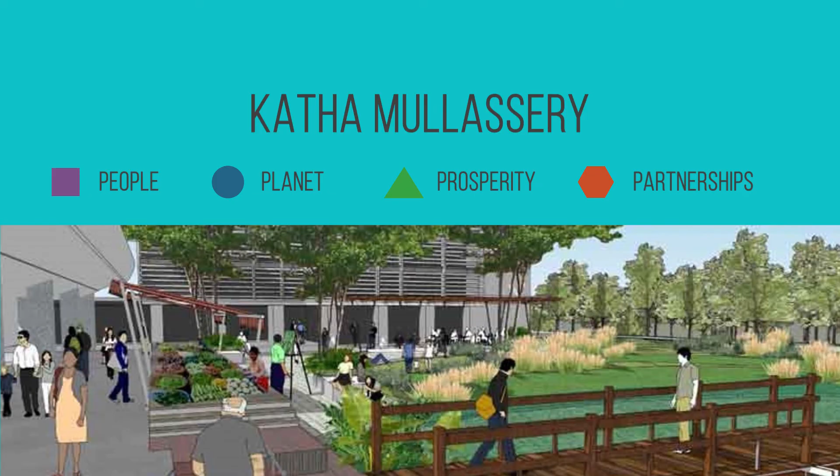The story of our competition entry, self-titled by us as Katha Mullassery, spans across 5 cities, 2 time zones, and nearly 2.5 months. The way the team came together, the process of working and putting together the final outcome, is a story that is as important to the final entry as the design decisions themselves.

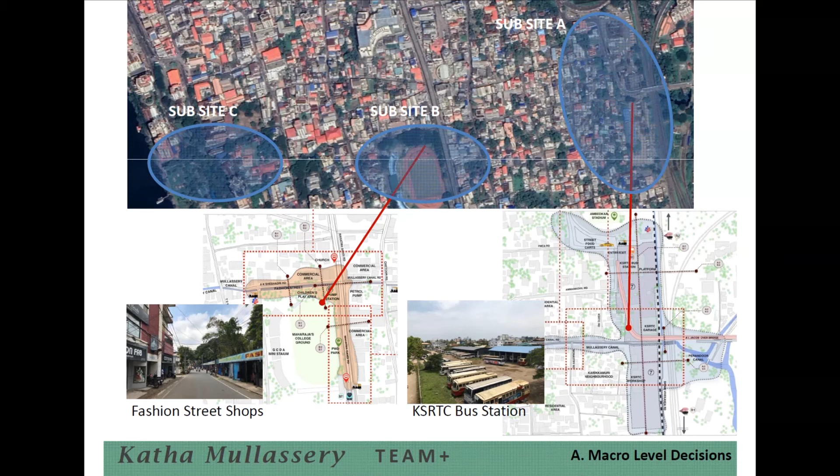The actual design exercise was undertaken simultaneously at two levels. Using the framework of the United Nations Agenda 2030 of People, Planet, Prosperity, Partnership, and Peace, we established and analyzed the broad issues highlighted in the design brief as well as our visions for the precinct. This framework helped us map the problems, stakeholder recommendations, and potential of the precinct and subsites in a way that brought out critical interventions and the manner in which we could address the problems so as to achieve co-benefits for stakeholders.

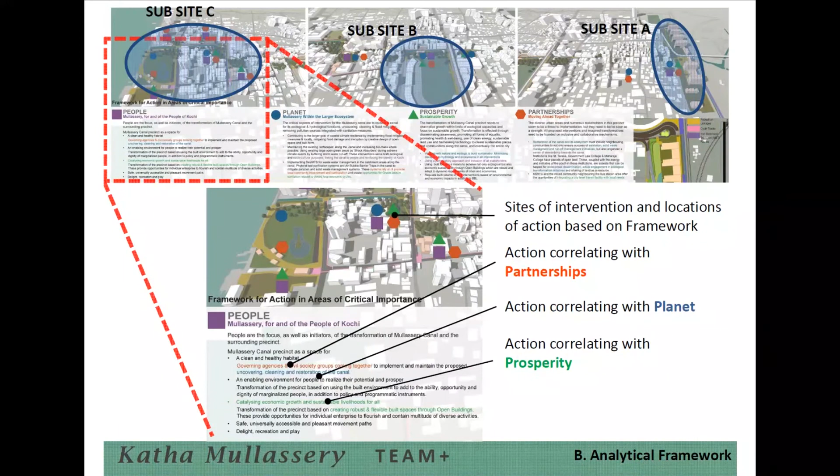Our intention was to ensure each action under any one area of people, planet, prosperity, and partnerships was reinforced by actions and outcomes in other areas, resulting in well-rounded interventions. These interventions were then mapped out on the physical sites within the precinct. The synergies between all the critical areas were clearly concentrated in the design interventions of the subsites, especially around the KSRTC bus station and the Fashion Street.

So at the master plan level, our moves were directed by some broad considerations. Two most important ones were to reimagine Mullassery within the larger ecological system, pointing to the revival of its ecological and hydrological functions for the precinct, and also towards larger goals of coastal climate resilience.

The second important aspect was to re-envision Mullassery Canal for and of the people of Kochi by ensuring that all actions focus on people and they are also the initiators of the transformation of the precinct. This was aided by actions within the areas of green growth principles for prosperity and focus on collaborative efforts for taking ahead the transformation through very strong partnerships. And it was assumed that our proposals could be easily woven into the already established methods of participative efforts towards sustainable development in Kochi and the state of Kerala as well.

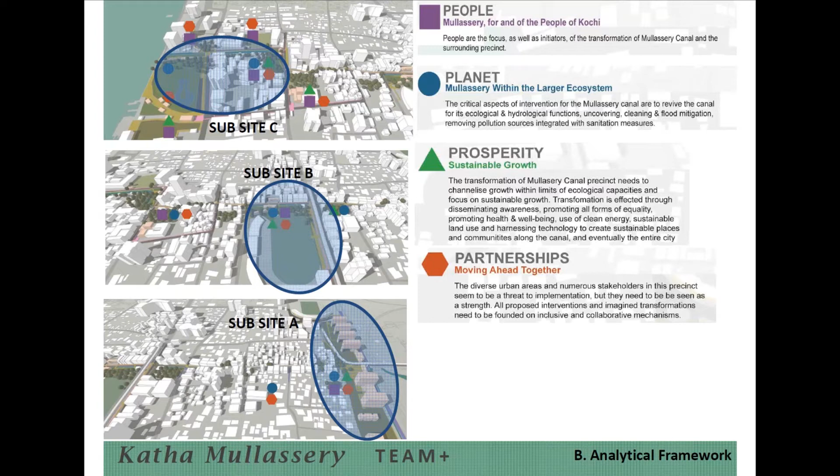So the other level was to create strategies at the precinct and subsite level for ecology, hydrology, placemaking and mobility, and built environment. We therefore developed narratives for each of these themes, which formed a large part of our online discussions as a team. So the first sector to be tackled was obviously the hydrology ecology narrative for the master plan level decisions. This was, needless to say, closely linked to the sanitation and the drainage of the entire catchment area.

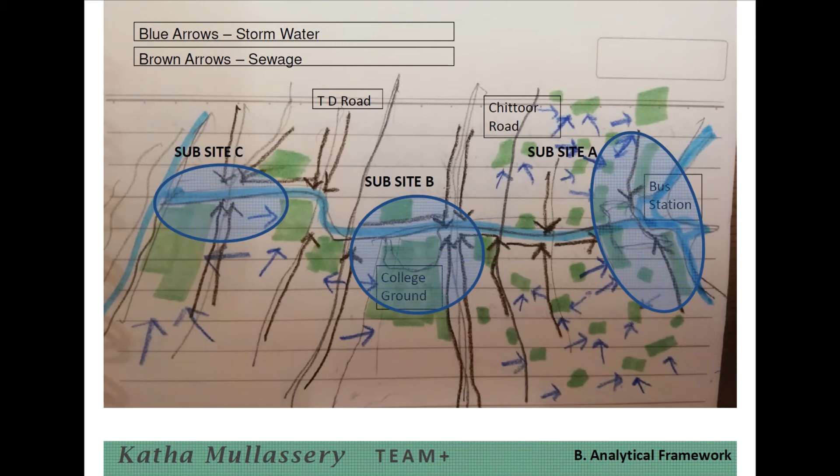Apart from the obvious uncovering and cleaning of the canal, stormwater management required interventions which were twofold. One was the reduction in surface runoff by promoting green roofs wherever possible. So we've identified that as number one on the slide.

And rain gardens and using existing public softscape areas to act as shock absorbers by buffering storm runoff. Number two, to create more room for the canal by widening and treating the edges of the canal to increase capacity to accommodate variable water volumes. This was accomplished through detention ponds at the KSRTC subsite and by regrading the edge of the adjacent land at the Maharaja College's ground just south of Fashion Street.

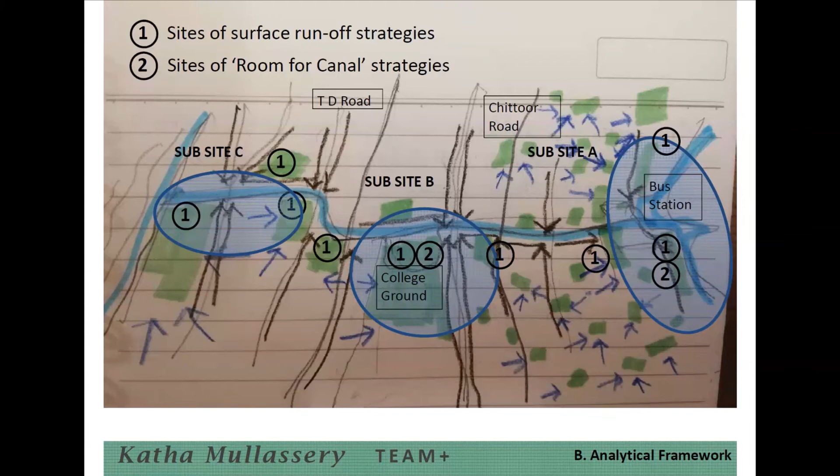So to address sanitation, a graded system of solutions was thought of. The application of DEWATS, decentralized wastewater treatment systems, with grey water recycling via flushing systems was our preferred choice. However, since this entails large-scale refurbishments which may not be immediately viable for individuals, a secondary method of root zone treatment was proposed to be implemented. And lastly, where space constraints would not allow RZT, aquaponic systems were proposed to recycle the treated grey water.

Incidentally, a successful pilot project for aquaponics exists in a small village called Cherai, which is very close to Kochi.

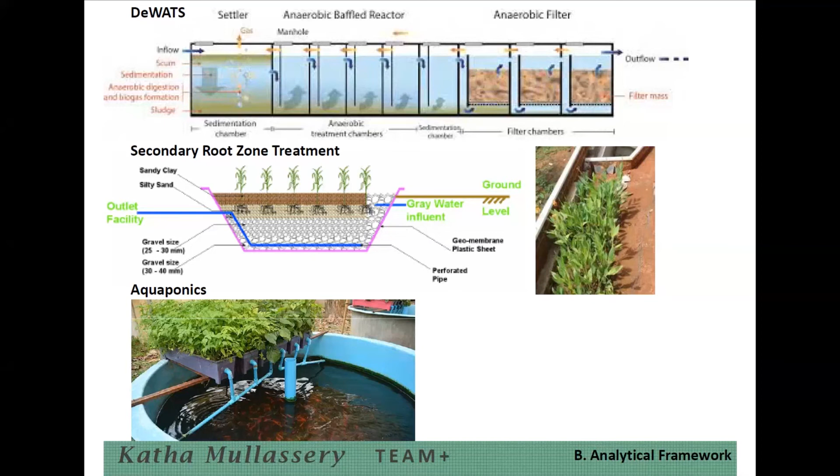So then, poring over the street view images on Mapillary, which was new for some of us - it's a user-driven street-level imagery platform, a collaborative platform - it helped us see the ground reality regarding the imageability of the entire precinct.

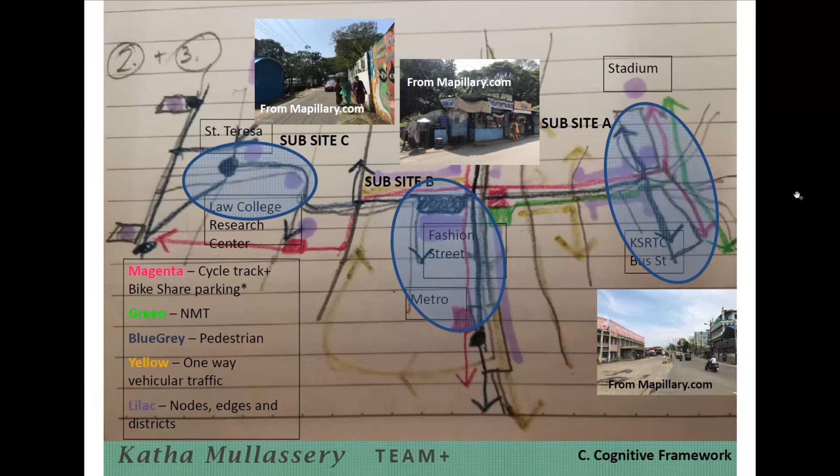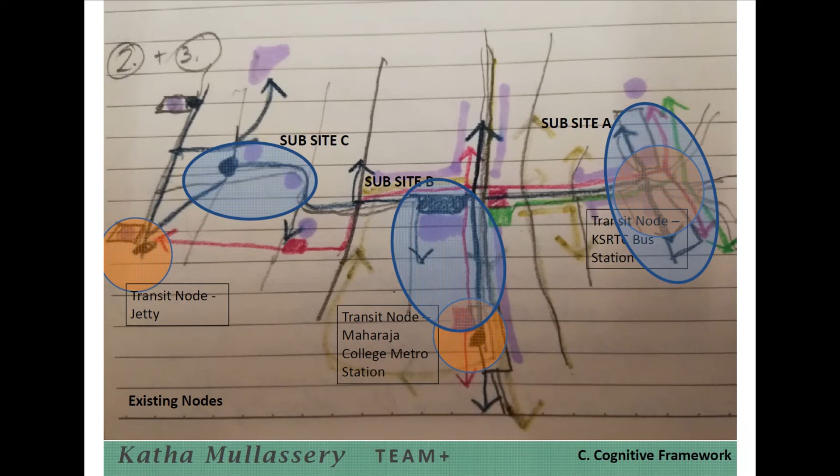The canal, as Anamika pointed out, is mostly visually disconnected from movement paths. So our main intent was to address not only the connectivity between the three nodes, that is the KSRTC bus station on the right, the metro station in the middle, and the jetty on the left, but also to use placemaking and pedestrian shortcuts as stitching devices to weave the canal back into the city fabric.

So this led to the development of new urban nodes in conjunction with the existing nodes, being in orange, and the new urban nodes being in red. These were created with the objective of layering multiple activities involving a wide range of users and increasing safety through the day and night.

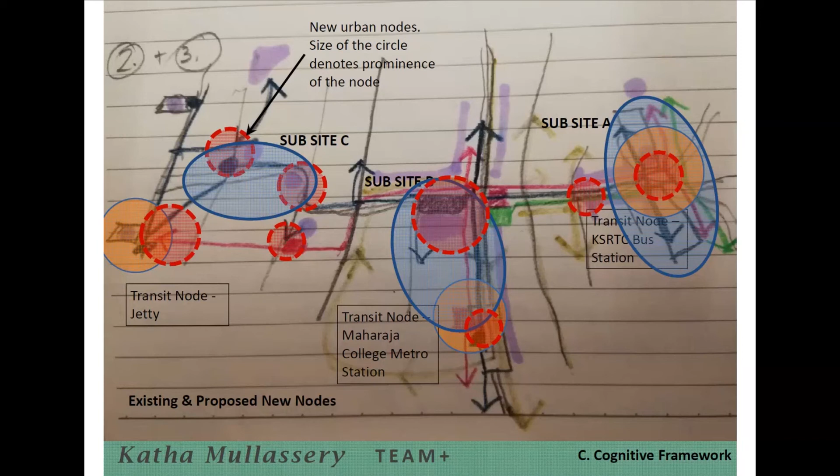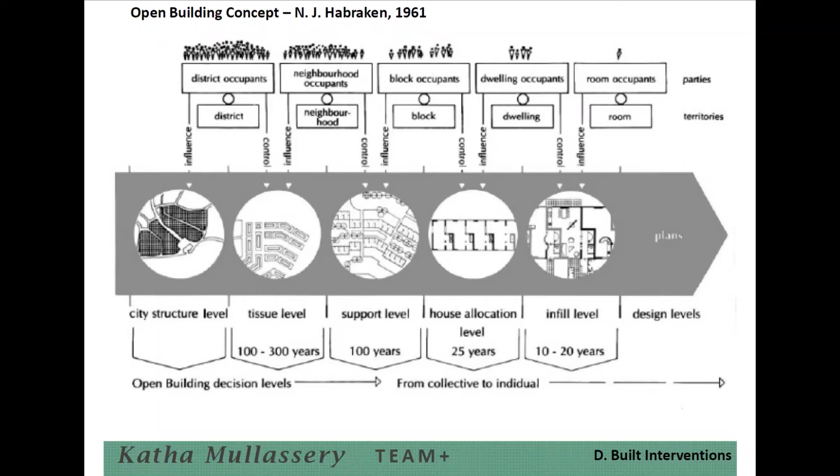While the decisions regarding hydrology and ecosystem related aspects of the canal were specific in the type of interventions, we realized that any built interventions would need to be robust and flexible to be implementable. So the designs for the redeveloped Fashion Street Market and the bus station were both based on open building systems, a concept introduced long ago by John Habraken. The diagram on screen summarizes this concept. These systems were used, lending these structures a high level of adaptability, and as a spatial and construction system, afforded the possibility of our designs not being very deterministic in nature.

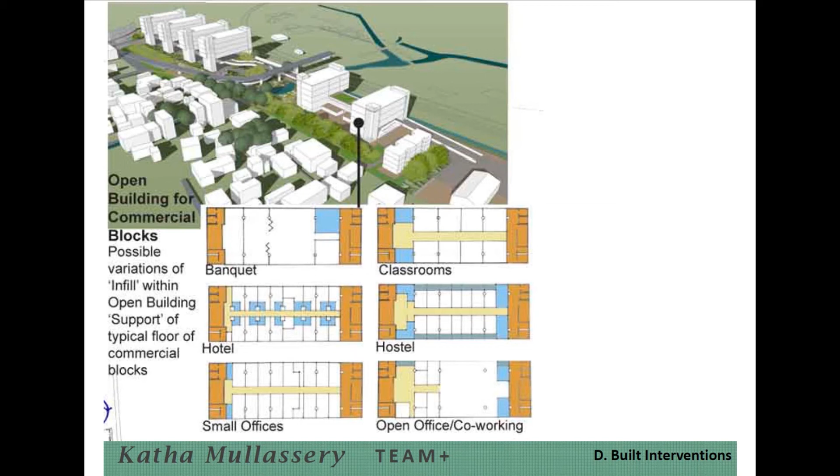At the master plan level, these thematic narratives crystallized into specific interventions across these three domains. The focus was on creating solutions threading all stakeholders and benefiting from their synergies, and the driving philosophy was that of the Geddesian concept of conservative surgery.

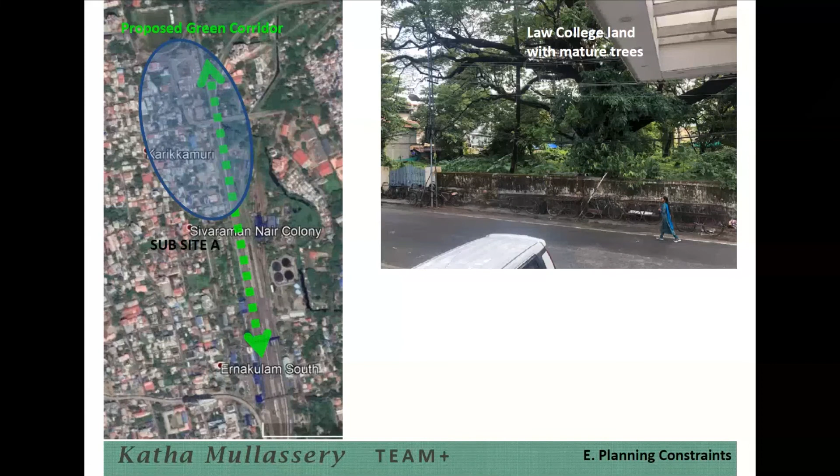The second factor was the land constraints, especially in terms of land available along the canal. Our strategies for hydrology, sanitation, ecology, and build form were grounded in systemic solutions that were viable and implementable within the existing space constraints. Many of our conceptual solutions never made it through the tight sieve of spatial and practical implementability. We had regular discussions on these.

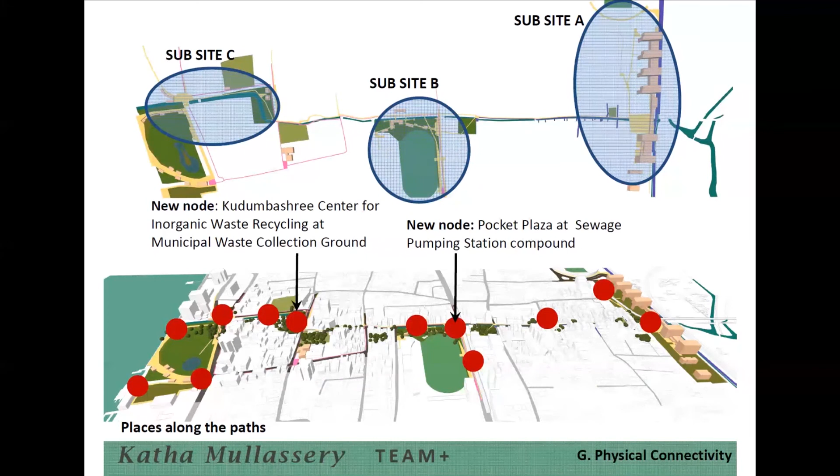So the resultant design proposal was in the form of a continuous, well-connected and experientially diverse pedestrian path and cycle track, highlighted in red on the upper part of the image. These paths and tracks connected the three transit nodes and paratransit points, and also strung together transformed urban nodes like the Fashion Street Market, creating new quote-unquote places like at the Municipal Waste Collection Ground and the Sewage Pumping Station corner. The canal road from the intersection of Karikkamuri Cross was proposed to be an e-vehicle, NMT, and pedestrian zone, with only vehicles of residents allowed to ply one way. This was aimed at catalyzing a transformation of this stretch into a pedestrian-friendly environment with appropriate activities along the edges.

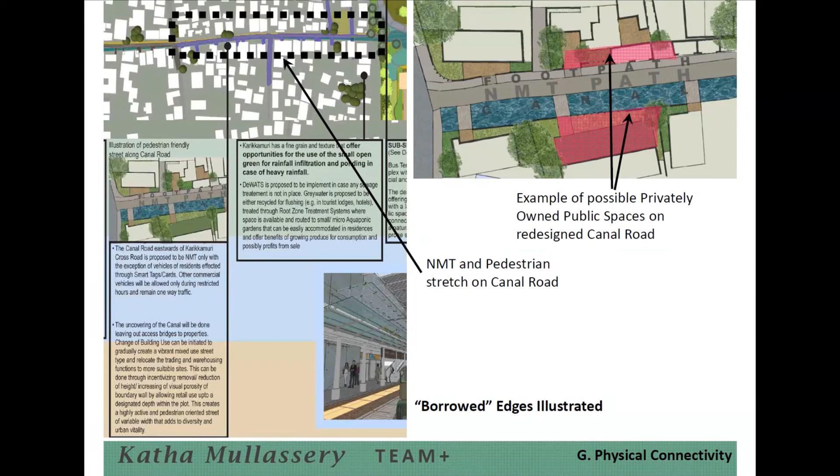We also introduced the concept of borrowed edges, shown in the diagram on the right, that would incentivize pocket-sized, privately owned public spaces - POPs for short - to support the mobility-related interventions. Similarly, the pedestrianized carriageway of MG Road was designed for a wide pedestrian walkway edged on one side by the municipal park, as seen in the rendering on the right-hand side. A cycle track ran along with it, and on the other side, a platform below the carriageway supported evening and informal markets, seen on the left of the rendering. The presence of the park could then be further used by introducing a plant nursery and a composting unit, which would recycle the organic waste from the informal market.

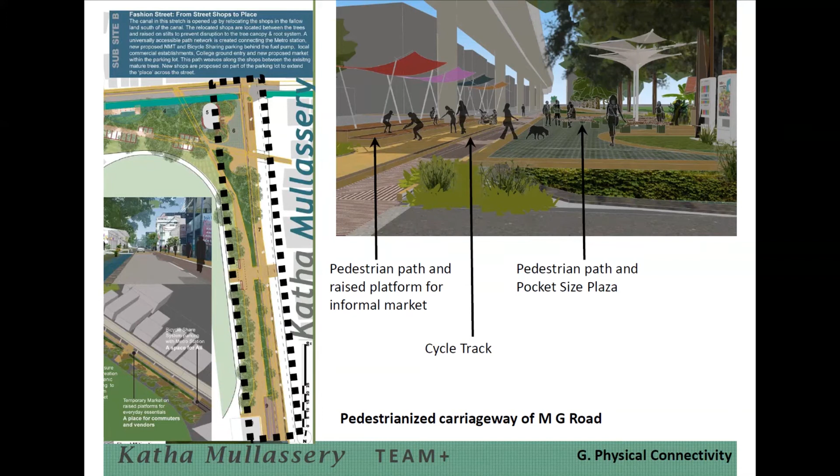The built interventions were seen as flexible, adaptable urban inserts that act as containers of activities which would revive and transform the entire precinct. These were envisaged to catalyze transformation and harness the potentials of synergies between different stakeholders. As an example, the proposed built intervention in the Law College hostel compound, and the channelization of movement of St. Teresa students between their college and hostel compound through the redesigned Municipal Waste Collection Center, were opportunities to harness such potentials. We saw possibilities in promoting interaction between Kudumbashree workers and students from St. Teresa, as Kudumbashree workers were likely to be working in the waste collection compound. We also saw possibilities in promoting interaction between the students from both colleges, between scholars of the Law College and the informal settlements of Padika Kukulam as well.

So that concludes the first part of the broad presentation, and now we'll discuss the individual subsites. The first one is the Fashion Street.

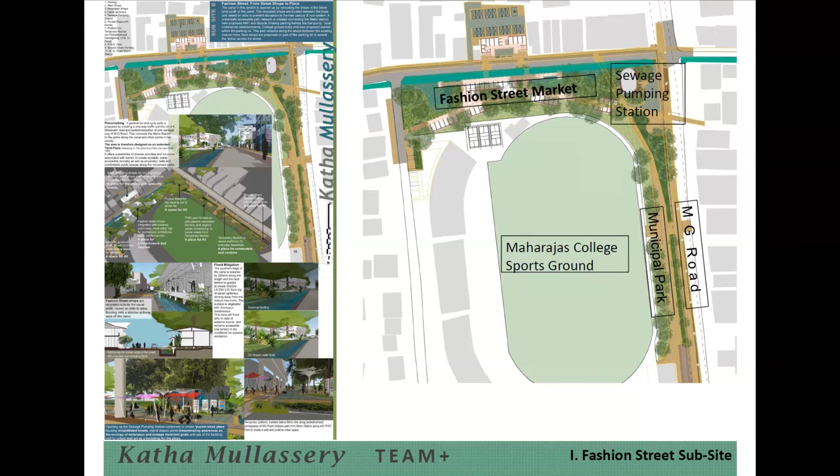This was the more straightforward of the two subsites we selected to focus on, in the sense that the design intents were pretty achievable. Available unbuilt land was used to create more room for the canal for inundation during floods, as you can see where the black arrows point, with the canal going from left to right, and wherever we could create additional storage for stormwater, we proposed that.

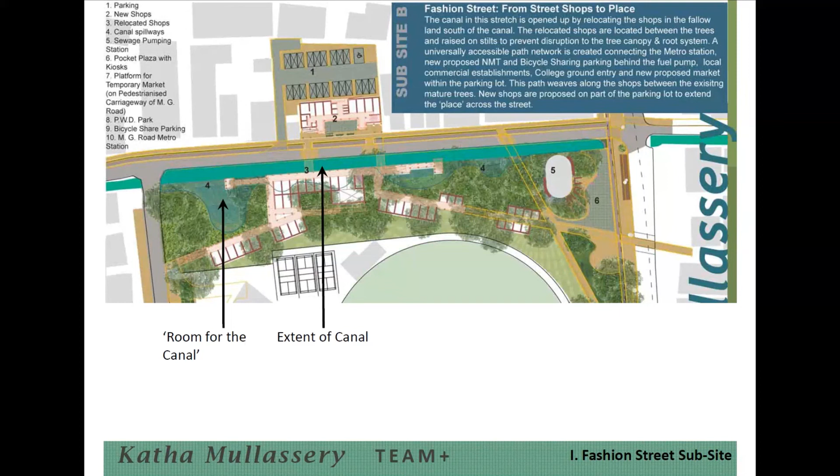This strategy, however, was constrained by the presence of mature trees, so widening the southern bank of the canal was done with attention to leaving as much space for the root systems of the trees as feasible. The absence of any information about the tree types, and therefore knowledge about their root systems and structures, did not allow us to be any more precise in offering a solution.

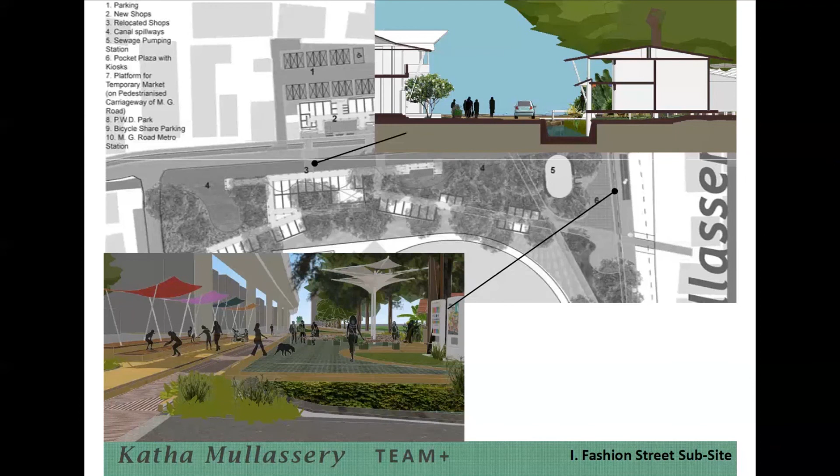But the creation of low-lying, seasonally inundated areas, which you can see in the section at the top below the building, became a starting point for placemaking - using the reorganization of the Fashion Street shops on stilts and establishing pedestrian connections from the Maharaja College Metro to the shops and surrounding nodes.

The raising of the Fashion Street shops on stilts - here's a more detailed rendering - enabled the integration of the reorganized market with the low-lying areas below, and secondly, it offered the benefit of maintaining access and preventing losses to these shops in the event of flooding.

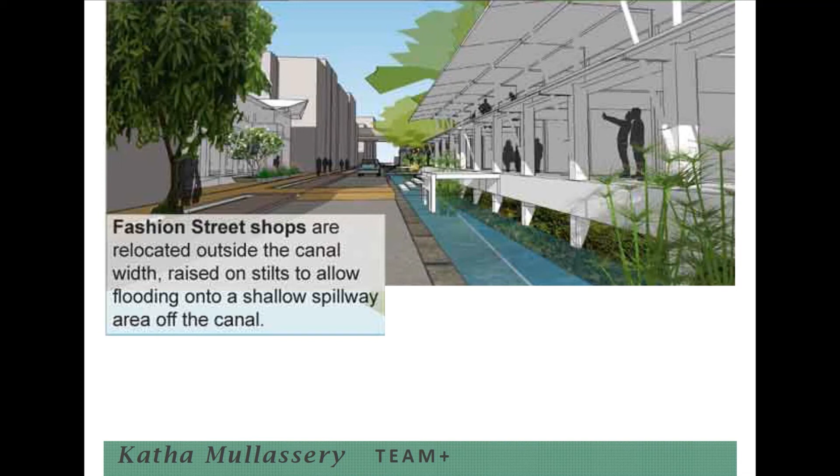Two mobility-related moves were also made. The street was envisioned as a one-way vehicular street to free up space for creating a cycle track and a pedestrian pathway.

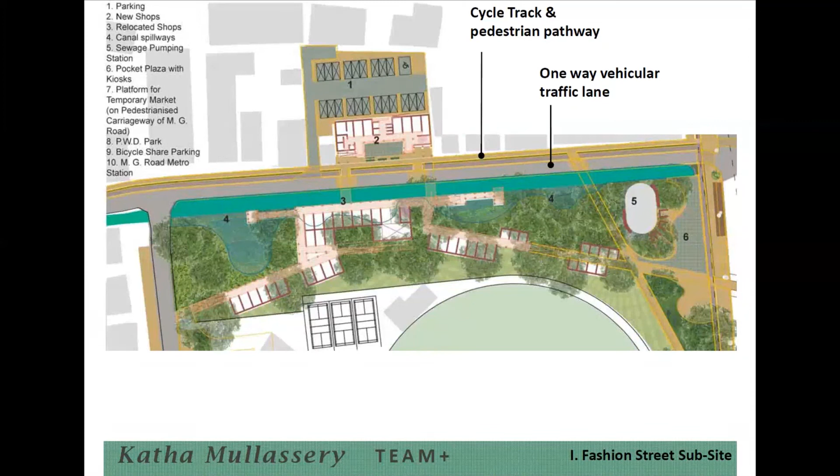The parking lot visible towards the upper central part of this image was redesigned to accommodate a scissor parking system that freed up space for building a small shopping complex complementary to the Fashion Street shops with a forecourt. The intent here was to create an added attraction to Fashion Street and leverage the potential profits from these shops to cross-subsidize the refurbishment and redevelopment of the Fashion Street shops.

The integration of the Fashion Street with the pedestrianized carriageway of MG Road, as you can see in this rendering, used the compound of the sewage pumping station as a kind of corner pivot in the form of a pocket-sized plaza, where we felt existing vendors could be rehabilitated, and the facade of the pumping station itself, the gray building at the back which is not particularly attractive, could be used for digital infographic displays about sanitation and the canal.

We felt in the end that this multi-pronged approach, including media and graphics, would help sensitize people to pertinent issues, since this corner already has high visibility for pedestrian and bicycle movement in both directions.

Now we come to the second subsite which we designed in greater detail, the KSRTC bus station. While we initially thought of avoiding this subsite due to the possible complex transportation-related design aspects, the potential of this site for implementing other strategic decisions and visions actually outweighed the tricky design for the bus station itself.

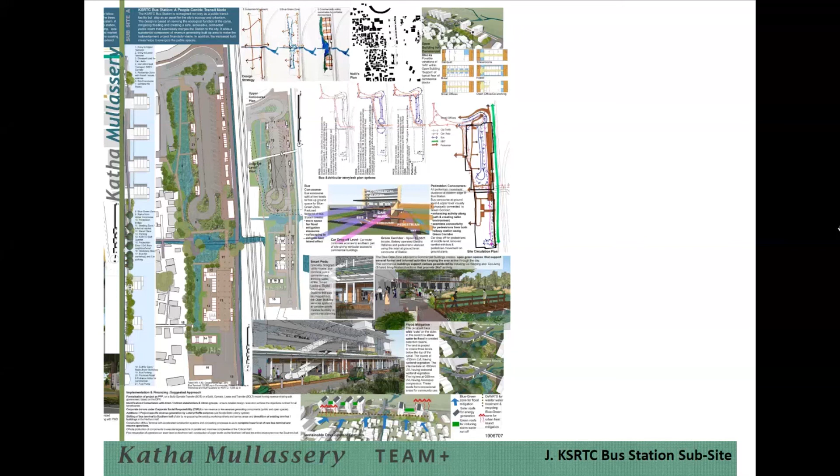The proposed green corridor connecting South Ernakulam station with the bus station, the demand for a strong solution to the problems of flooding within the site, the degradation of the canal ecosystem especially at the junction of Mullassery-Perandoor Canal, the constraints of the railway tracks and A.L. Jacob flyover, and lastly the issues of safety from crime in the area were primary drivers for what we saw as a comprehensive solution.

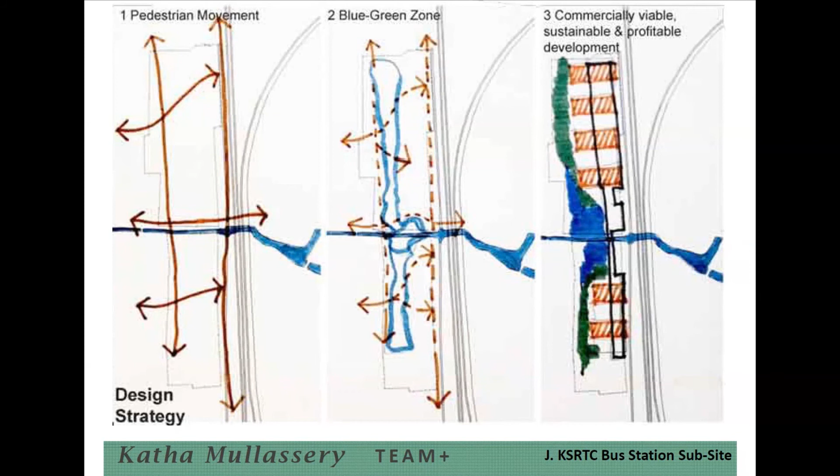Our key moves were to create a pedestrian network and a public interface with the proposed green corridor, and therefore have a permeable ground level in the bus station building; leave the western edge on the north-south side for stormwater management, passive recreation, and pedestrian uses; and finally promote the possibilities for sustainable and viable development.

This was done by creating a public space interface with the city fabric towards the west. The resolution of the bus station for capacity, pedestrian movement and vehicular circulation was difficult to crack.

The schematic or systemic solution for these three components kept simmering in the background for very long. The first hurdle was that the data regarding trip characteristics given by the organizers was cryptic and not of much use. So we consulted some friends who were transportation planners and figured out we would have to proceed based on certain assumptions.

The subsequent struggle was to work out the system for the terminal and circulation suitable for the site plan diagram we desired to follow. So the big breakthrough ultimately was to sandwich the vehicular access and movement between both levels of the bus station concourses, as you can see in the exploded perspective rendering at the top.

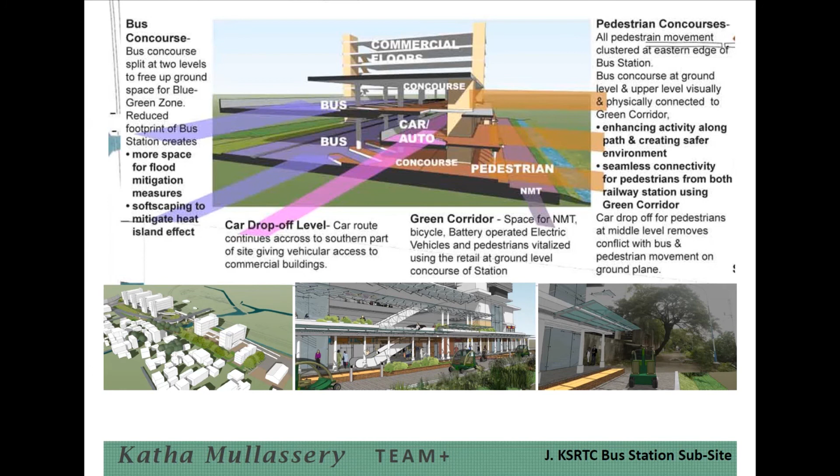This immediately freed up the required space on the western edge of the site for the ecological recreation zone, and it tied up neatly with the pedestrian zone and green corridor on the eastern edge. The elevated carriageways also made it easier to regrade the canal edge to accommodate tidal inundation and limit hardscaping at the ground level.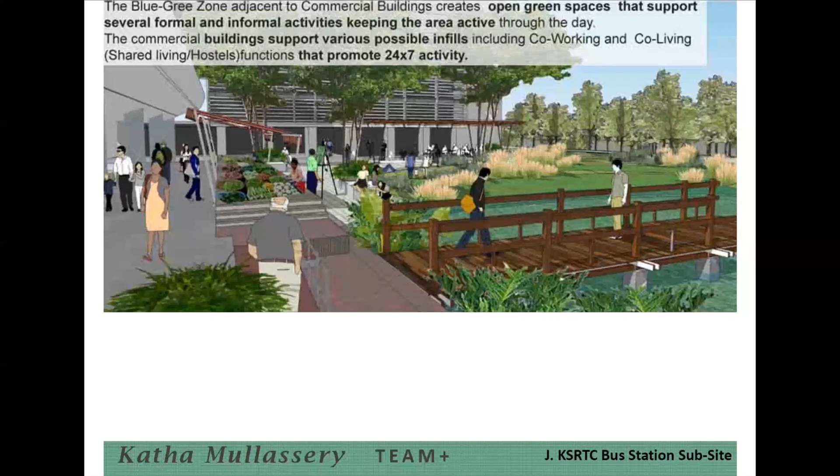The articulation of this blue-green infrastructure was based on the vision of integrating the open space and facility with the city, and therefore envisaged it as a vibrant, active open space for use by all.

The spatial physical organization of the built components used a system of service cores and a viable structural grid deployed across the site for the terminal building and commercial blocks. We decided that restricting the consumption of the full available FAR was necessary, and this was done by building only as much as was optimum in terms of metabolic flows and real estate viability.

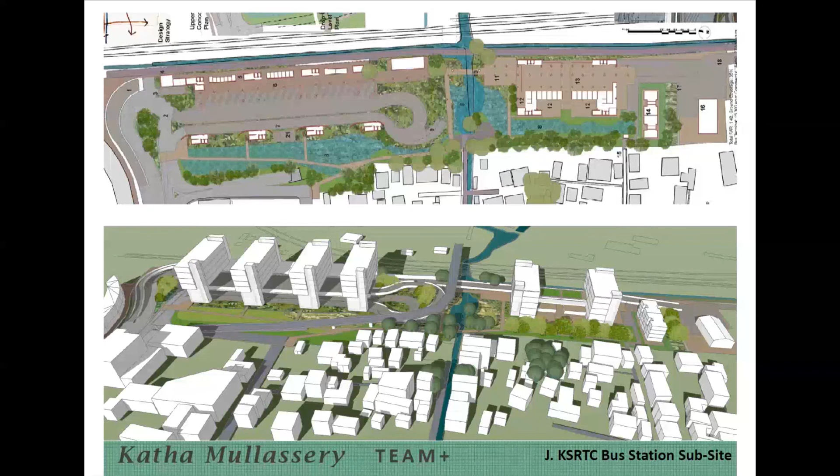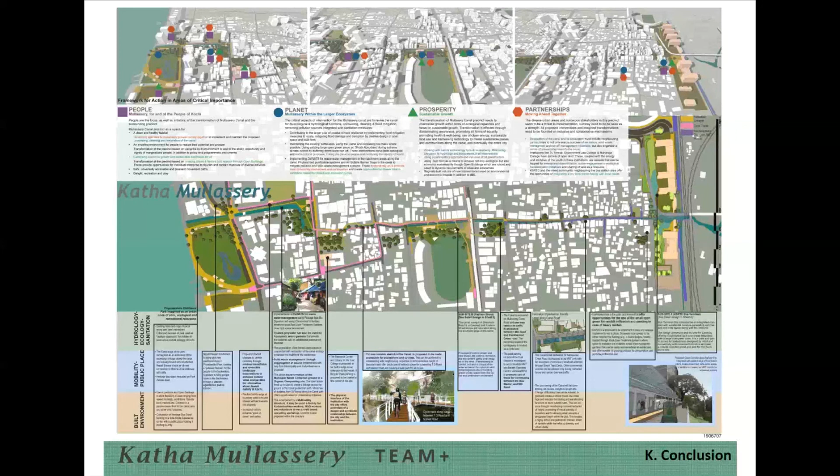This brings us to the final challenge, which was to compact all of this that we discussed and talked about, and several other minutiae, into two sheets while retaining legibility. Reminiscent of our student days, it was accomplished with several near all-nighters. It was a lot of hard work, but worth every bit of what we gained out of the whole exercise.

In retrospect, this competition was an enjoyable journey, and what we gained out of it was a lot—learning more about the involved subjects, collaborating online, and how to achieve the most through optimum intervention. This exercise offered us the opportunity to position our design solutions within the larger discussions of sustainable human habitats and contemporary urban challenges. In the process of bridging fine-grained interventions that address larger scale issues, we reaffirmed our belief in a contextually grounded and practically appropriate design.